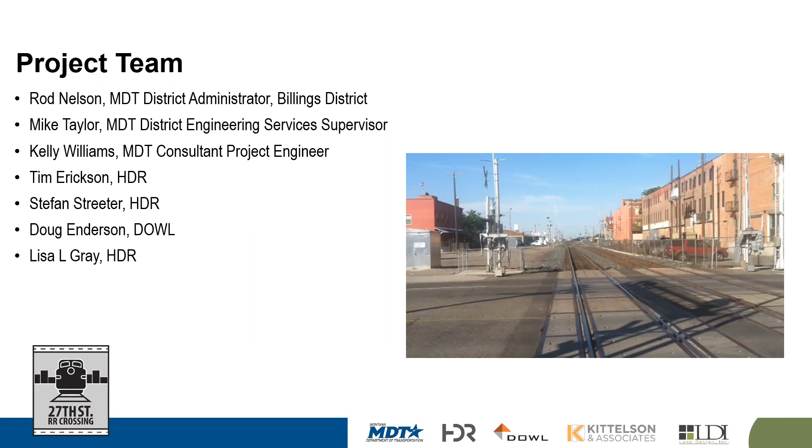Thank you, Lisa, and thank you everyone for joining us today. My name is Rod Nelson. I'm the Billings District Administrator for the Montana Department of Transportation. Public involvement is a vital part of everything we do at MDT. So we are very appreciative of the opportunity today for sharing with you this very important project and you sharing with us your questions, comments, and concerns.

Looking at the agenda for today's meeting, I wanted to start out by giving you a quick overview of the 27th Street Railroad Crossing Feasibility Study. Then Tim Erickson will be presenting in more detail the specifics of this very important project. The entire presentation should take about 20 minutes to complete, and then we'll open it up to questions and comments.

Several years ago, a high-level statewide study was completed identifying the railroad crossing on 27th Street in Billings as being a high priority for MDT. So a more detailed study is now being conducted to identify specific solutions that are fundable and meet the needs at this location. The intent is to develop a feasibility study to determine short and long-term solutions for the existing at-grade railroad crossing on 27th Street.

So with that, Tim is going to speak with you in more detail about the 27th Street Railroad Crossing Feasibility Study. Again, please don't hesitate to write us with any questions, comments, or concerns. If you prefer, you can email the project team anytime after the meeting. The project team contact information will be shown at the end of the presentation. Thank you.

Thanks, Rod. Again, this is Tim Erickson with HDR, and we've been working with the MDT for the past few years on this project. And as most of you are aware, numerous studies have been done over the past 50 years, if not more, including quite a few concerns from the community to our public officials as far as the safety of this crossing, and other concerns of the crossing when the frequency of trains that block the crossing and the abilities for emergency services to cross the crossing and some of those things.

The study that Rod had mentioned was completed back in 2016, which was a statewide at-grade rail crossing study. And it did show that 27th Street was one of the busiest railroad crossings in the state, creates congestion, frustrated drivers, decreased downtown user experience, and has impacts to the emergency services.

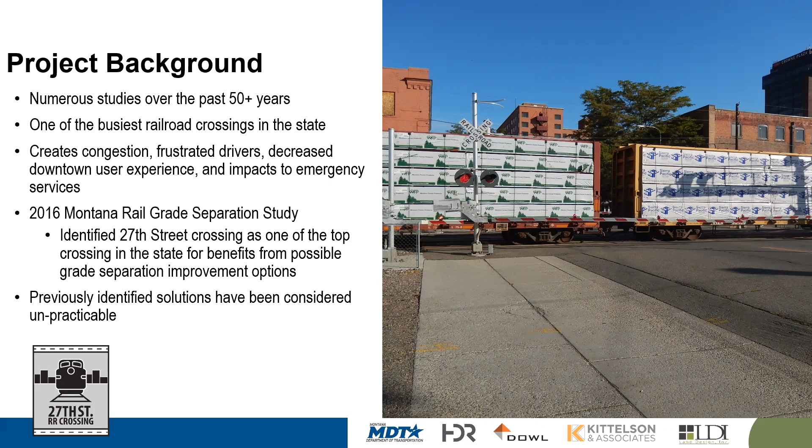Looking at our study objectives, the previous studies that have been performed have been a much higher level study. Think of that as like a 10,000 foot level study. This study that MDT has moved forward with is a ground level study. We want to be on the ground with our surveyors, looking at geotechnical information, turning over rocks, finding pros and

cons of different options, and put all that information into the alternative analysis that's being performed. Something to note with this study is Montana Rail Link has been an integral partner and stakeholder with MDT from the beginning of this project. Previous studies have identified or looked at options to raise the tracks, lower the railroad tracks, or completely relocate the railroad tracks. And those have all been deemed infeasible for several different reasons and are considered a fatal flaw as part of this project moving forward.

MDT and MRL have been very clear that this study is going to focus on the public infrastructure and find opportunities to improve safety and mobility of this crossing focused on that public infrastructure, which would be 27th Street itself.

Part of the study, we want to identify short-term and long-term improvement solutions. How we define short-term would be to leave the existing crossing as it is at grade and find ways for signal improvements, as well as what's considered ITS, or intelligent transportation systems, to find improvements and have advanced warning to help motorists and users of the crossing know when a train is crossed, and to be able to find alternative routes if necessary. How we have determined or defined long-term improvement solutions would be to look at a grade separation, so either over the tracks or under the tracks with traffic to help alleviate safety and mobility concerns.

As we look at what has been performed as part of our analysis, the very first phase, we had a lot of brainstorming going on. What ideas are possible? What could happen here? We wanted no bad ideas out there, so we wanted to have all the ideas on the table.

We looked at taking all lanes of traffic over or under the tracks. We looked at taking just the center lane of traffic over or under the tracks. Through that analysis, we determined, especially with the 4 lanes or all traffic lanes going over or under, that created a severing connectivity to the downtown area by moving all traffic off of 27th Street either over or under the tracks. And so those options were removed from further analysis.

So what you can see on the screen is where we currently are with recommendations for 2 different alternatives, as well as a no build, for further consideration. Those alternatives are a 2-lane overpass, meaning over the railroad tracks, with a single lane of traffic in each direction going over, and a 2-lane tunnel, so a single lane of traffic in each direction going under the railroad tracks.

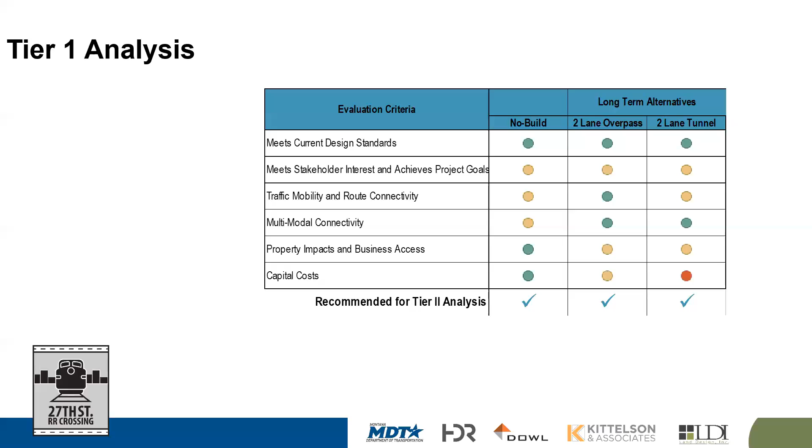The next slide shows short-term alternatives recommended for further analysis.

Some additional alternatives that we have looked at in the past was consideration for closure of either 28th or 29th Street crossings, to see if there would be enough benefit to the railroad operations that could improve the 27th Street crossing itself. The conclusion of looking into that a little bit further, and again with MRL as a key stakeholder at the table with us throughout that process, is there was minimal benefit to railroad operations for closure of those crossings compared to the impacts it had on connectivity from vehicular users and pedestrian users that frequently use those crossings at 28th and 29th to access different parts of downtown, either north or south of the tracks.

So as previously mentioned, the short-term alternatives we are moving forward with are signal modifications and ITS. In fact, the current 27th Street project, under construction for the last couple of years, includes signal modifications at 27th Street and Montana Avenue, with a dedicated left turn signal in the southbound direction on 27th Street to turn onto Montana Avenue when trains are crossing the tracks there.

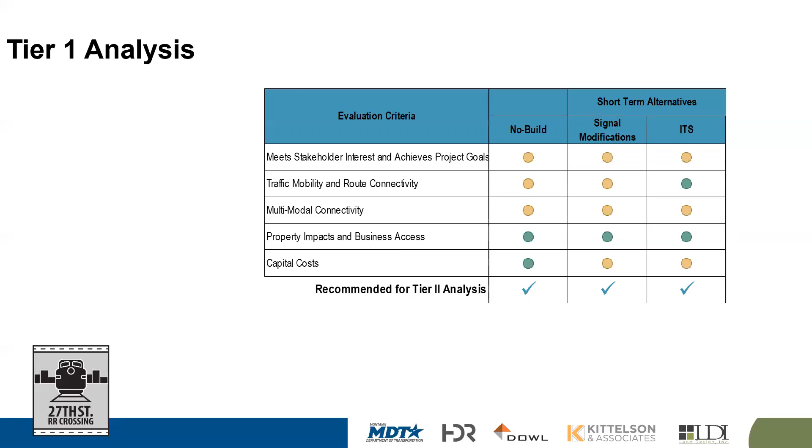The two-lane overpass, as previously mentioned, would have a single lane of traffic in each direction going over the railroad tracks, while a single lane in each direction would stay at grade. That provides opportunities to maintain connectivity through the downtown businesses and adjacent cross streets to different areas of downtown, as well as opportunities for reduced traffic, slower speeds, and enhanced pedestrian experiences in the downtown core.

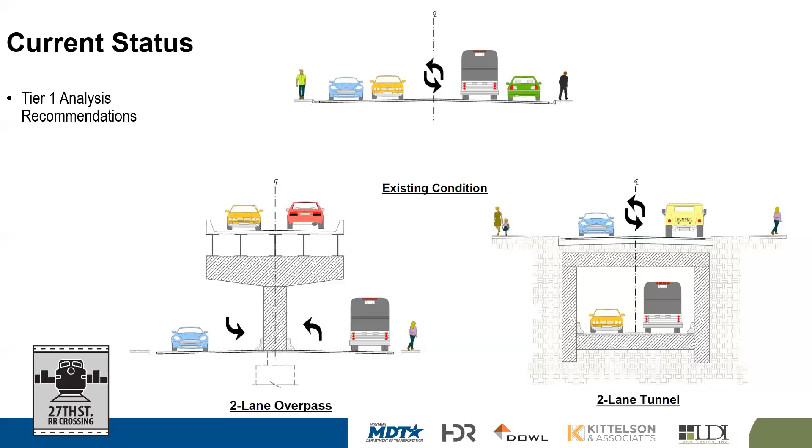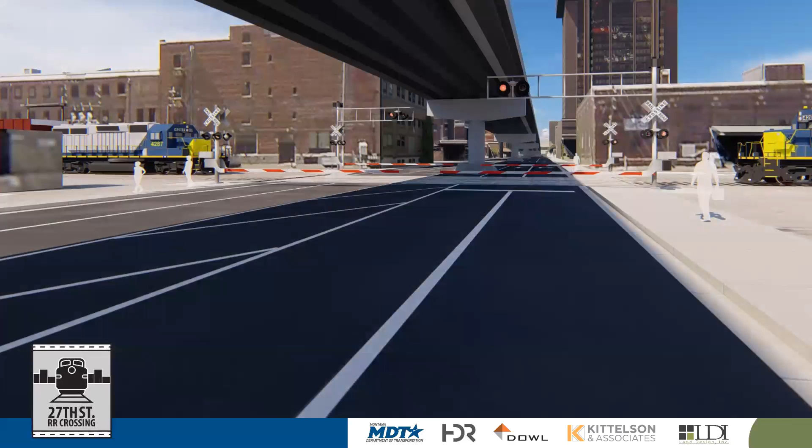The next slides show some renderings our team has put together to help visualize what these different alternatives could look like. Starting with the overpass option, the first view is to the south of the railroad tracks, looking north, showing a two-lane overpass.

Something to point out here is that an overpass provides opportunities for placemaking potentially under the structure. There have been many conversations with various stakeholder groups and special interest groups, and we've created an aesthetics committee to help explore ideas, so that if an overpass was constructed, it wouldn't just be a large concrete structure through downtown Billings.

It would actually include placemaking, with opportunities to have a positive visual impact in the downtown area and be something people want to go to. It could be a feature for our community, something different people would want to become a destination in the downtown area.

Some of those placemaking examples could include raised medians with landscaping, pedestals for local artwork and statues, and connectivity for different pedestrian facilities throughout the center. There may even be an opportunity to close down segments of this roadway underneath and have the farmers market or other types of events underneath the overpass.

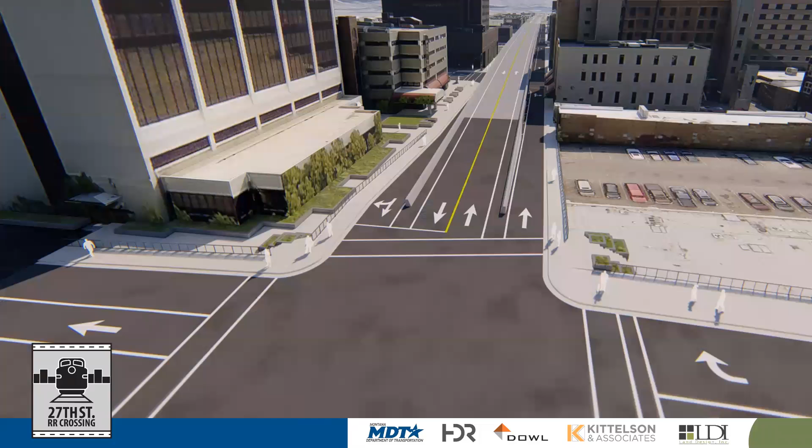Moving on to the next image, this is from 2nd Avenue North looking to the south. As you can see here, this is what we would call a touchdown point or a starting point for the overpass option. This would be where the overpass comes back to grade with the existing roadway. You can also see how traffic would split to having one lane of traffic stay at grade and one lane of traffic in each direction use the overpass.

Operations from a traffic perspective of the existing intersections and cross streets remain as is. As the design moves forward, further analysis would need to occur to determine if the different turning movements at all the different cross streets and existing intersections are able to be maintained, primarily from a safety perspective. The priority for both options is to maintain traffic operations through the intersections as they are today for the busier streets or arterials - that'd be 1st Avenue South, Montana Avenue, and 1st Avenue North.

Other streets such as Minnesota on the south end of the project and 2nd Avenue North on the north end of the project, in the overpass option, maintain connectivity across 27th Street. But again, further analysis would need to be looked at to make sure that all turning movements crossing the way would be safe, primarily from a sight distance perspective, which means the ability for a driver to be able to safely see other vehicles as well as pedestrians to avoid potential conflicts.

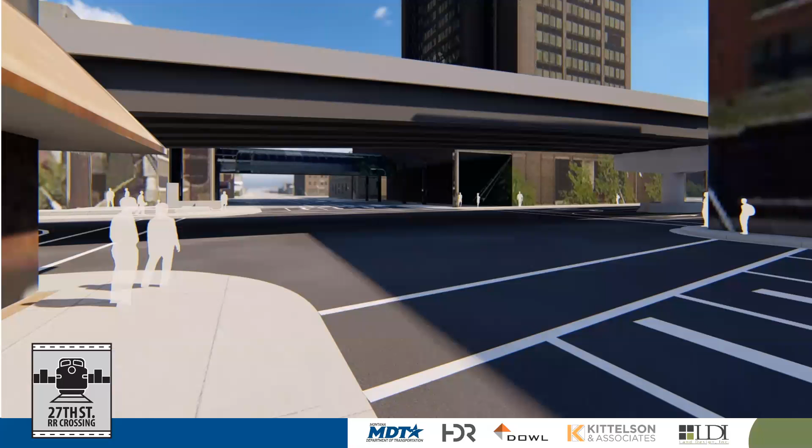And the last image for the overpass option is standing at 1st Avenue North looking to the east. Again, this is to showcase the opportunities that could exist - we want community input for aesthetic and placemaking opportunities, so it's not just a standard concrete bridge through the downtown core. So what could that look like?

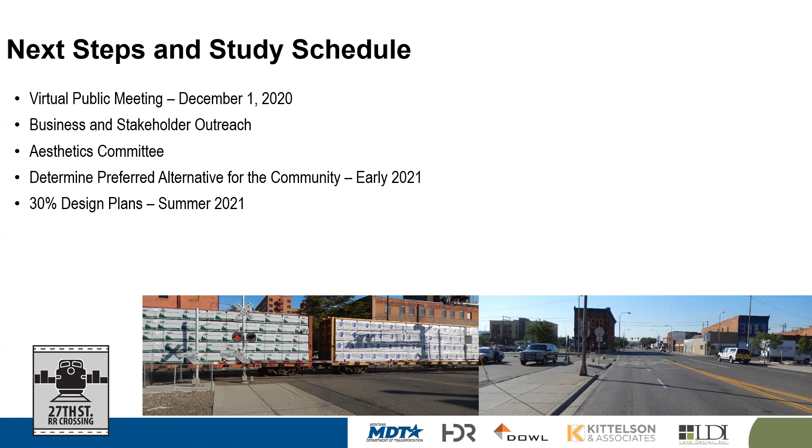Thank you, Tim, and thank you, Rod. As previously mentioned, MDT will use public input from this online meeting to develop and refine the 27th Street Railroad Crossing project, and will continue to work closely with the community and stakeholders. So we hope you will stay involved in the project.